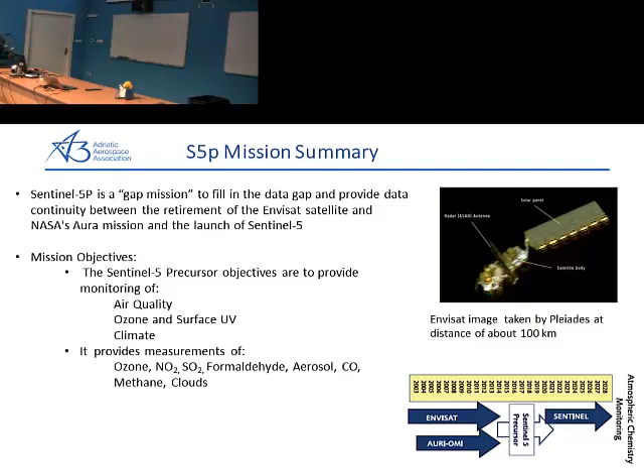Okay, so now about some mission dates, mission details. We are going into a sun-synchronous orbit, its altitude is just about 800 kilometers, and inclination angle is about 98 degrees. So the polar orbit is lifted above the North Pole and passes by 8 degrees.

This is what we call a retrograde orbit, because when you look at the North Pole, the Earth is rotating that way, towards the east, but when you look at the projection of the spacecraft, it has the opposite sense. So we call it a retrograde orbit.

Orbit repeat cycle is 17 days, so after that the spacecraft will come to the same point. The swath width is the angle projection on the Earth from the spacecraft which covers the ground. So if the instrument is looking down on the Earth, what it sees on the Earth is the swath distance, and it covers about 2,600 kilometers.

Science data collection per orbit is about 92 gigabits. Data downlink is normally once per orbit. Operational lifetime is about 7 years, although we carry consumables for 10 years.

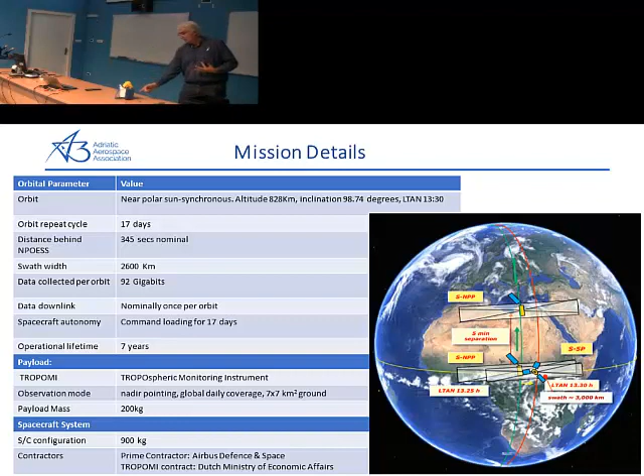What Tropomi means is Tropospheric Monitoring Instrument, and observation mode is nadir. That means the spacecraft Z-axis, in our convention — other countries and organizations have different conventions — but our convention is that the Z-axis is the longitudinal axis of the spacecraft.

The mass of the Tropomi instrument is 200 kilograms, and the mass of the spacecraft together with Tropomi is about 900 kilograms. And the contractor was Airbus.

I need to explain something to you. For a spacecraft, this is the payload or instrument. Below the instrument, we call it the bus or platform. In some literature, or for some people in the UK, they call it the spacecraft platform.

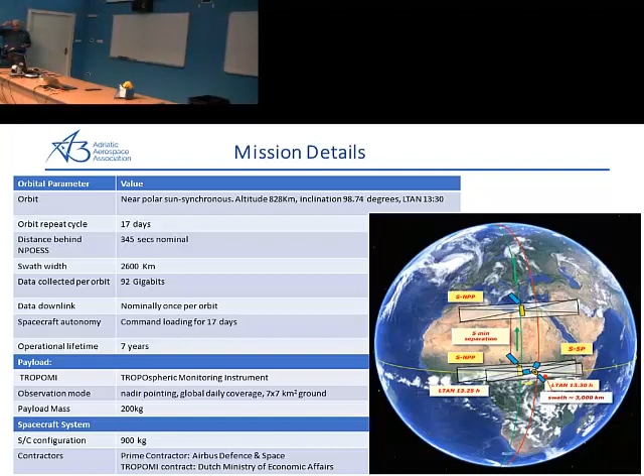All data coming from Copernicus and Sentinel-5 is free for use. Everyone among us can access the data.

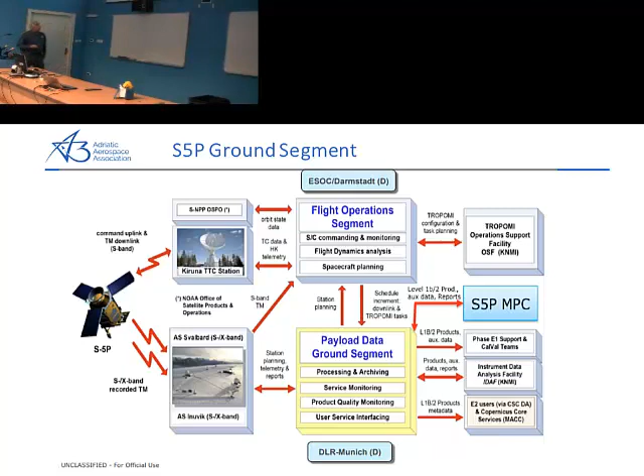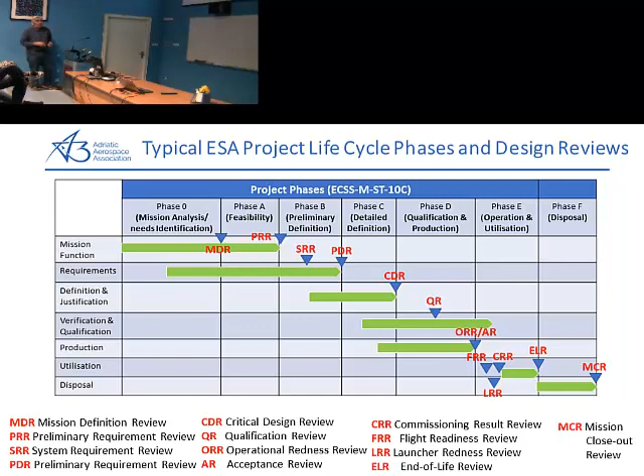And then we go to build the spacecraft, qualification campaign, launch, flight readiness review, end-of-life review, and at the end is the mission closeout review. So now at each of these details, we're going to look a little bit more closely.

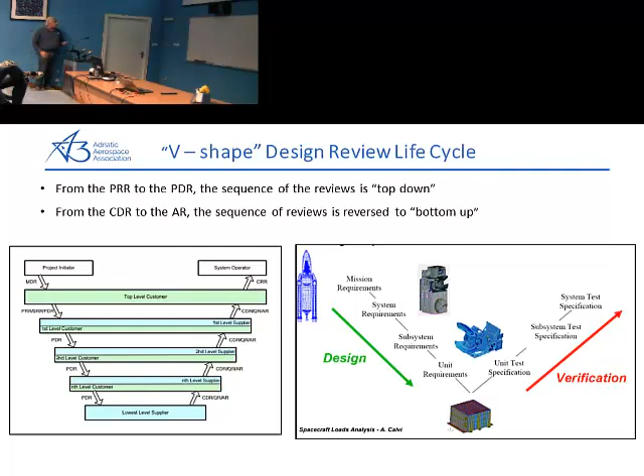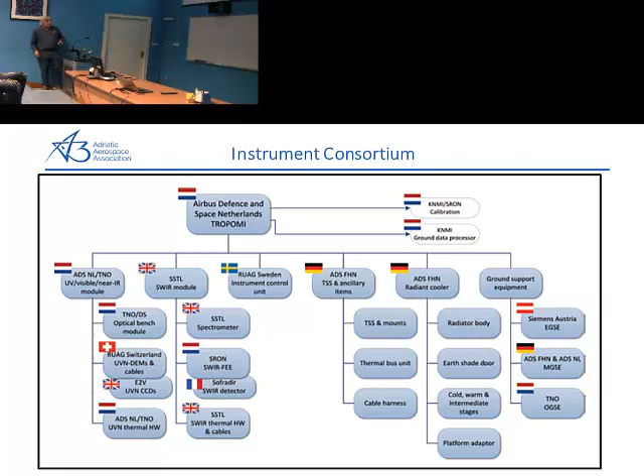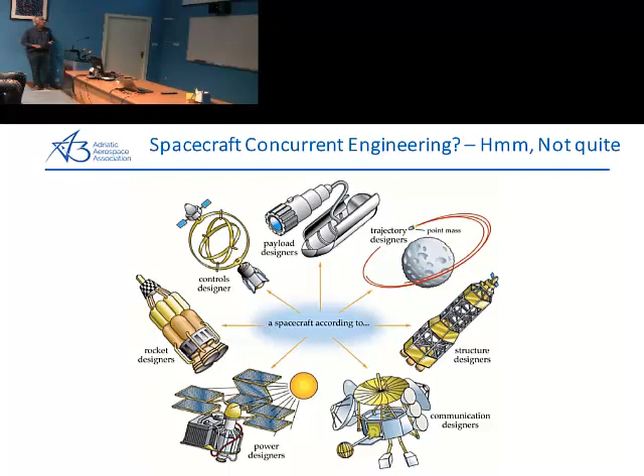So it's primarily top-level activities between the agency, a spacecraft integrator, the science community, and other organizations. Then we try to develop the preliminary technical requirements, identify possible mission concepts, whether we go into polar orbits, geostationary orbit, or maybe Molniya orbits. The Russians, they prefer more Molniya orbits.

Assessments of the payload technology readiness level - we need to see what has been flown before and whether we can build on that experience and knowledge. And we will also do a preliminary risk assessment. Can we perceive the risk coming towards us? Can we see just on the horizon? Or can some more experienced engineers, like myself, look around the corner at what's coming towards us?

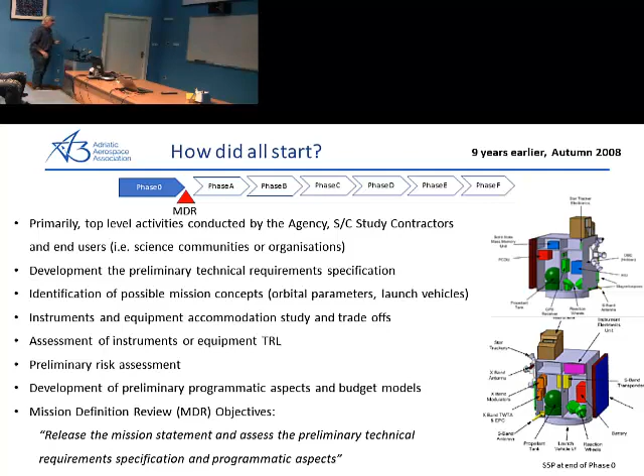So we had to create a bid team. A bid team works on creating a bid, which we later supplied to the agency. So we went through a lot of iterations - iterations that changed the whole concept of the spacecraft. And then at the end, at the top level, probably just the system engineer and engineering manager would go to the agency and review the system requirements, the top requirements.

And at that point, the system requirements are frozen - no change. This is it, this is the gospel now. We can't change the system requirements anymore. If we change the system requirements, it becomes very costly, okay?

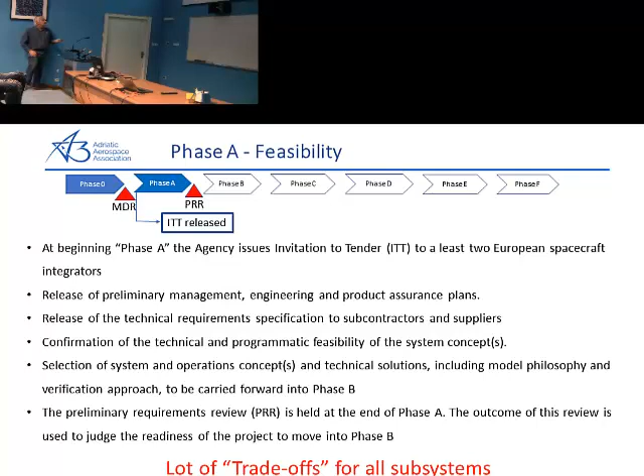So you are still in phase A, and you can see now how the spacecraft architecture, the geometrical model, is starting to look like the real thing. At this stage, we still wouldn't have full information about the geometry of the model, or full information about the geometry of the solar arrays or equipment.

So what we do is we just put what we call allowable volumes - a placeholder in the spacecraft. Our designers, the CATIA guys, will just put a box and say, well, that box is the OBC, onboard computer. Right there, at that point, is the PDHU or any other equipment.

In fact, at this stage, we didn't have even information about the solar arrays because they hadn't been designed yet, but we did know what the power requirements were. Our power engineers sized the solar arrays - actually, this solar array is sized about 1.75 by 1.24 meters. So they know the size required to support the mission and the payload, but we don't know the details, so we just put allowable volumes.

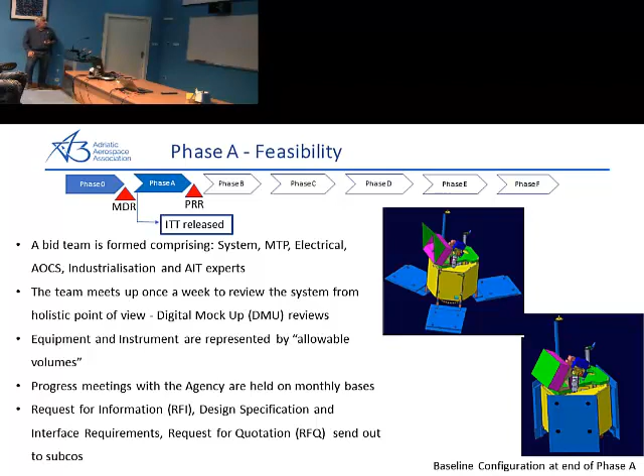But afterwards we will also send a request for quotation, where we ask them for a firm ceiling price to supply the equipment or subsystem. So this is at the end of the PDR - the process of the preliminary design review. It's not going to be exact, but preliminary - we would have a sort of feeling of whether this design would work.

At that point, we would decide which verification approach we're going to use, whether we're going to build a breadboard, engineering model, or maybe STM model, or what is going to be the whole spacecraft verification approach, whether it's FM model or PFM. BB is breadboard, EM is engineering model, STM is structural thermal model, FM is the flight model, and PFM is proto-flight model.

When we put them on the shaker to verify these models, they all have different verification levels. Flight model would have the lowest verification levels, and qualification models would have the highest. Breadboard is the model which just gives us proof of the concept. Engineering model we would build probably just from commercial materials and see roughly whether it's going to work or not.

Then we would update PDR data, update technical requirements, and a PDR data pack is sent to the agency to review. ESA will take all the data pack and turn every single stone in it, coming back to us with loads of questions. We call these questions RIDs, request for information or discrepancy. Sometimes they generate hundreds on a bigger mission. This is a small mission, but it could be 1,000 questions, and we would carry these questions almost to the flight readiness review.

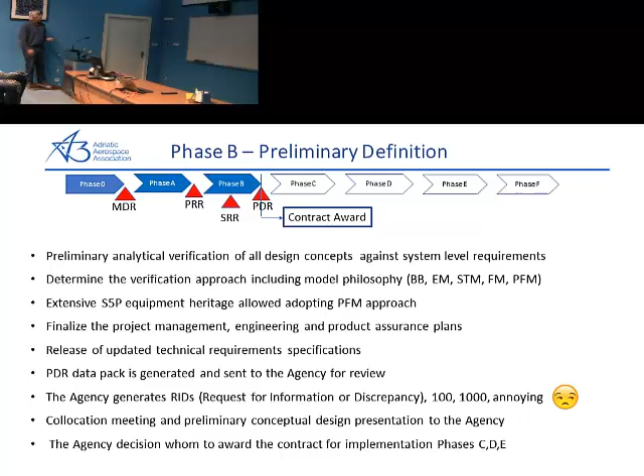Now we come into phase C. At the end of phase C is a design review called critical design review. This is a really important milestone in the design of the spacecraft. It's a point where you decide, or someone else decides for you, whether to carry the project through to assembly of the spacecraft, or you stop there and wait for better days.

In terms of analysis, we just turn the handle again. We do all the analysis we did at PDR, but now, after PDR, we've learned something, so we update our models, review our assumptions. Our mechanical models, FEM models, thermal models, or AOCS models look different now. We learned from the results of the first cut of analysis, so we're all busy updating assumptions, updating models, going through the same motions again, and again generate a data pack.

We send the data back to the agency, they review the data pack, they raise RIDs again, we go back to ESTEC, present our designs, try to shoot down as many of these RIDs as possible straight away, and ESA will decide: right, guys, our design is mature enough, you can start cutting the materials, or they can say stop, they just put a plug on it.

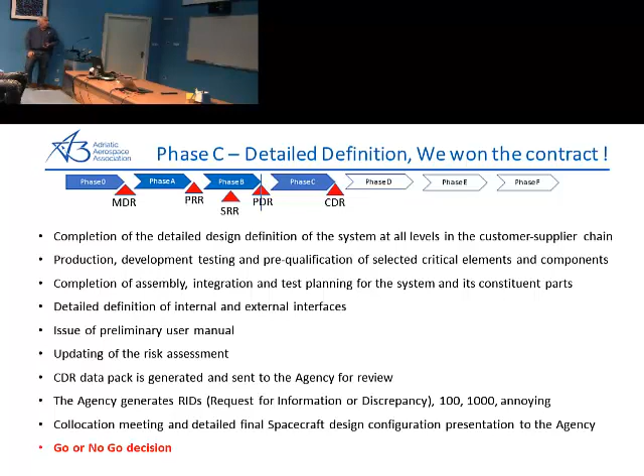Our Rockot was the primary launcher, and Vega, at the time when we started this design, hadn't had its maiden flight yet, so it was still in the development and qualification cycle. The spacecraft wet mass was 928 kilograms, so you need to go to the user manual and check what is the maximum lift mass where the Rockot can lift that mass and deliver it into an orbit just above 800 kilometers.

So we declared, to give us a bit of margin, that we're building a spacecraft which can deliver 1 ton of mass to orbit. So we had a mass margin of about 72 kilograms. Right, we had a problem here.

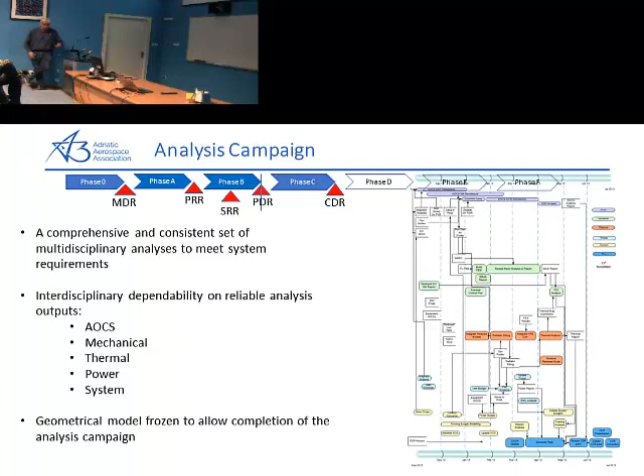So in mechanical architecture, we are like the Roman god Janus - we are multi-faced, facing so many subsystems, but we are actually the backbone of the spacecraft. We provide support to the equipment, we provide support to the payload, we provide support to thermal equipment.

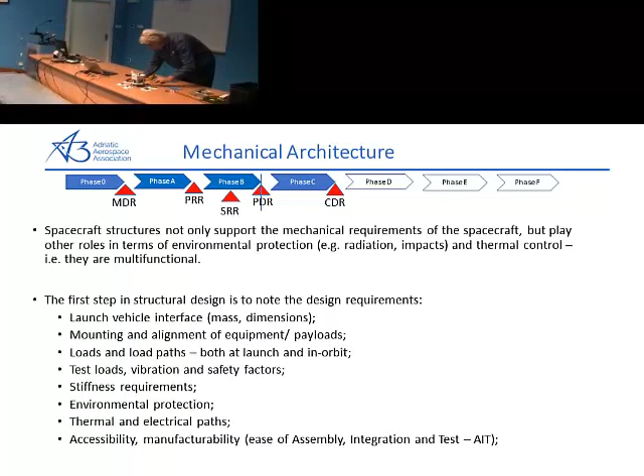So we distinguish three types of structures. We distinguish a primary structure, which is the structure that carries the load. Then we have what is a secondary structure, which will be like small bracketry here or there. Or sometimes we have what's called a tertiary structure, which is like small studs that support MLI, the multi-layer insulation.

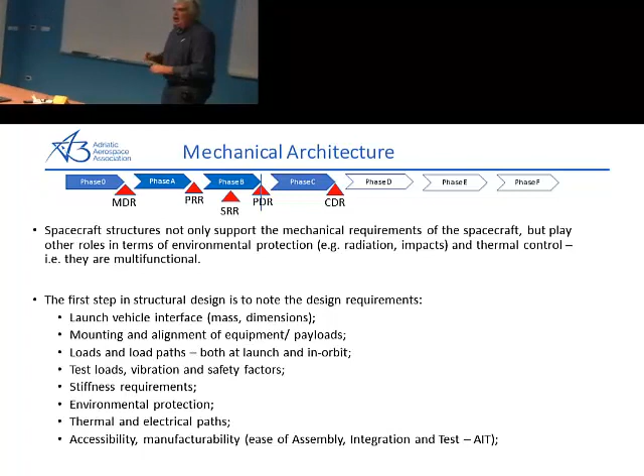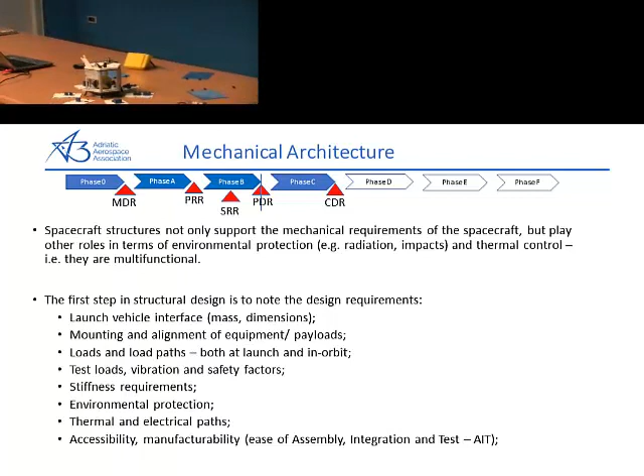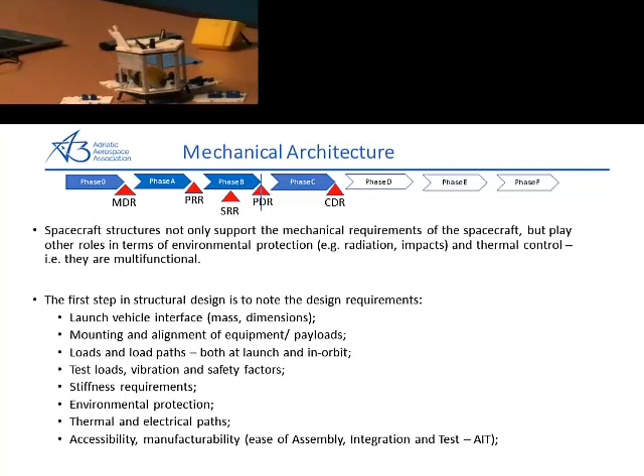So one of the first tasks for a mechanical engineer is to look at the launch vehicle interface. We need to look at how we can actually mount the spacecraft to the launcher, so we look at the bottom - it's called this round circle here, the launcher interface ring. We also look at whether we can accommodate the spacecraft into the launch vehicle fairing, so we look at the mounting and alignment of the equipment and the payloads.

For load paths, we use a mechanical analytical tool called Nastran, which is the industry standard. We look at stiffness requirements, which come from the user manual - each launch vehicle will tell you the minimum required stiffness of the spacecraft, both lateral and axial. We also look at environmental protection, how to protect the inside equipment from radiation and from meteor showers.

We also provide a thermal and electrical path to the spacecraft. All equipment has to be grounded, so we provide a grounding point from the equipment down to the spacecraft panels. But it's not only that - we need to make sure that whatever we design is manufacturable and can be assembled. This is what we call design for manufacture, making sure that everything we design and analyze can actually be made.

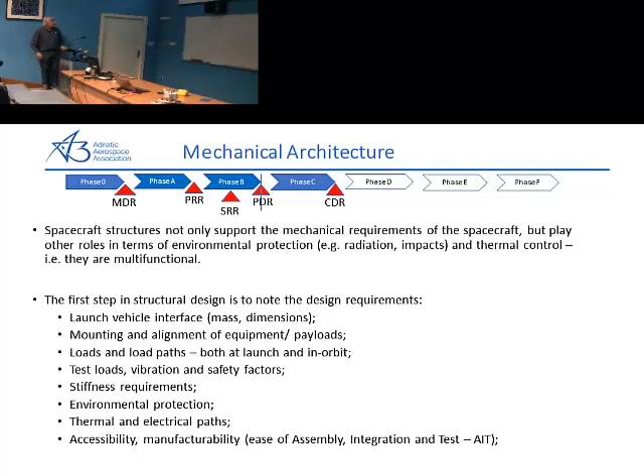Right, so I've brought some little pieces for you, I'm going to pass around. This piece here is a test sample for pull-out inserts. We do strength confirmation verification of the strength of this insert, pull-out and also shear. And you will see a cross-section of that insert, and consistency of the potting material of this insert.

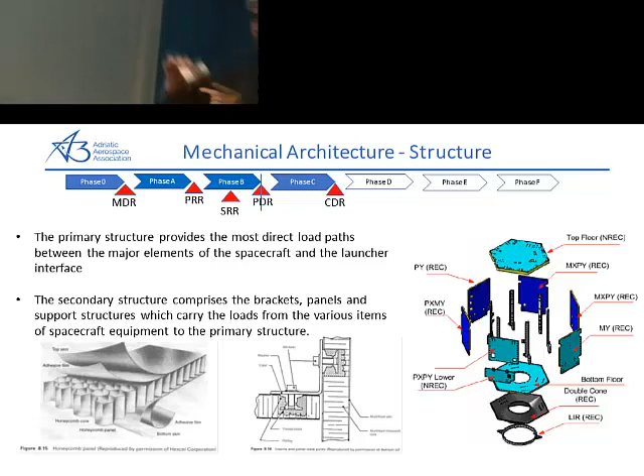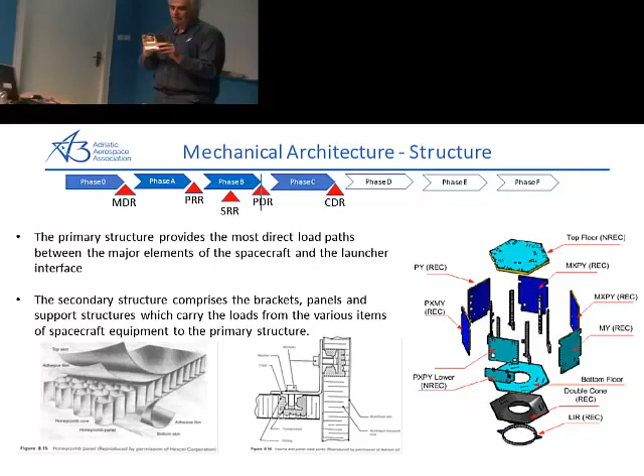So this is what we call a honeycomb sandwich panel, all aluminium skin. If you have good eyes and look closer, maybe not in this lighting, you'll see tiny little holes in the honeycomb core. These holes actually provide a venting path for air to come out, because when the spacecraft ascends, the air wants to expand. If it can't expand, it will pop out one or a few honeycomb cells.

So this is what we call a perforated honeycomb core. I'm going to pass a few pieces around. This one here is partially potted - we cut this in half and look at the consistency of the potting compound. And there is one which is fully potted. This one is a fully potted insert. You can see how light this material is.

So if you pass this around - cheers. What you see, that color, is actually an allochrom color which protects the spacecraft from corrosion. There are free atoms of oxygen which could attack the skin and corrode it. But also this particular surface finish is used for thermal protection as well, because it has good emissivity properties.

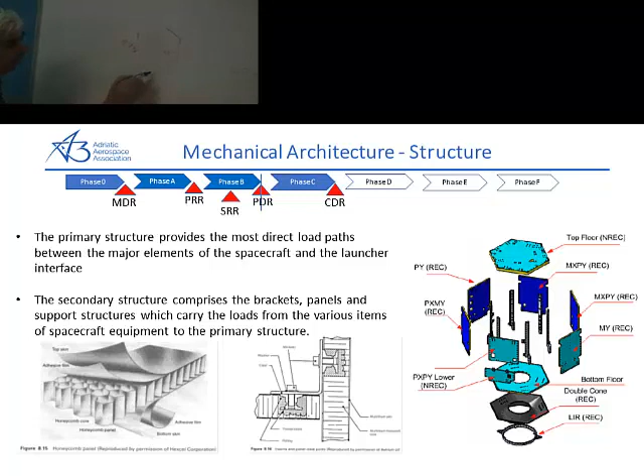On the launcher side, on the launch vehicle adapter, there is a similar profile, and it goes something like this. So these two surfaces are mating - this is just a guiding feature.

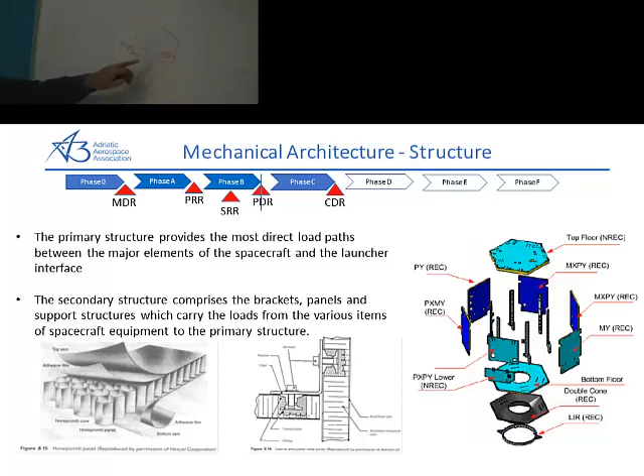And then, how are we going to keep these two parts together? How is the spacecraft not going to fall off? Well, there is something we call a clamp band - it's just like my belt. It's a tension belt, and on one side there is a pyro bolt. So we tension that clamp band, and then when the spacecraft is in space, we send the signal, the charge in the pyro bolt is activated, and the clamp band is released, and the spacecraft is free.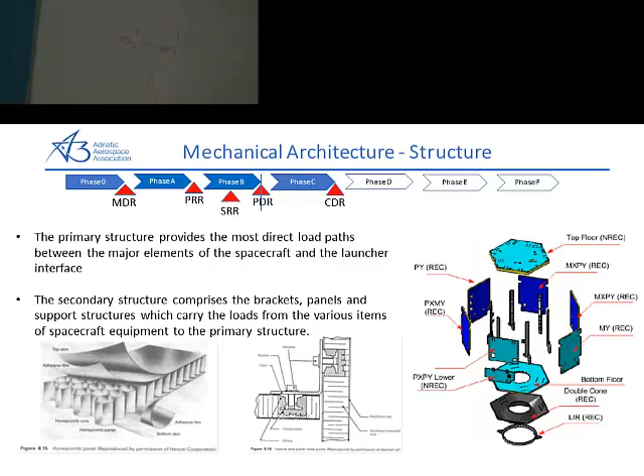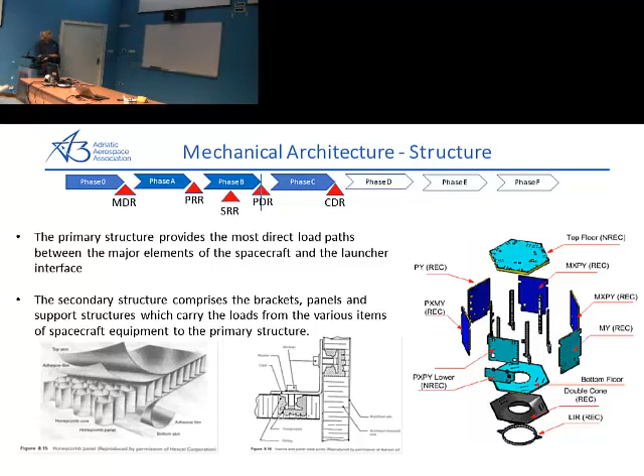Right, okay, now next one. Oh, let's take control - ah, it's here. Okay.

And then we will have axial mode, and probably one of the components would be generating mode shape. So we look at what is the modal effective mass associated with this particular mode. Imagine if I put the TROPOMI on the top, usually goes this side. What I get is just a drum effect of this top floor, the top floor just going up and down like a drum. That was part of the reason why I didn't like that design, but I was arm-twisted to go for it.

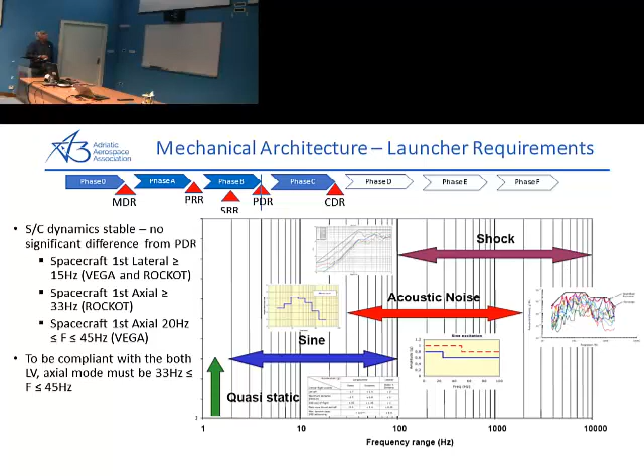Right, okay, so we are now still in phase C. We haven't passed CDR yet, I'm surprised.

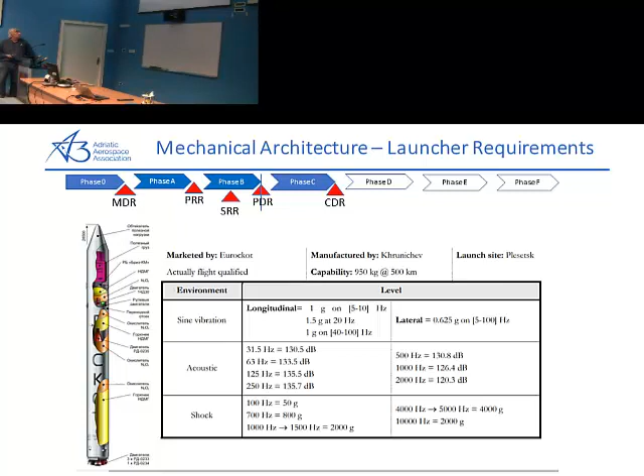Okay, so this is the same spectra, just in the picture. We can see quasi-static loads coming from acceleration of the spacecraft or some gust wind hitting the launcher, and then the spacecraft inside the fairings picking up that acceleration.

Sine vibration normally runs between 5 and 100 hertz. We analyzed the spacecraft to 120 hertz, but we qualified only to 100 hertz. The reason is that sometimes at the end of the excitation frequency, we have a mode building up.

So during the test, we really don't know whether... for example, if I have an axis, okay, can you see? So this is acceleration level, and this is the hertz frequency domain.

And then we have the first mode, second mode, and then something at 100 hertz. In our analysis, we might predict we have a significant mode somewhere here, but we are testing only up to 100 hertz. This is our analysis, this is how we perceive it's going to happen. In reality, that mode could come into the excitation frequency range. So this is the reason why we analyze the spacecraft to 120 or, in some cases, 140 hertz, just to account for that mode which would come into the excitation range of the spacecraft.

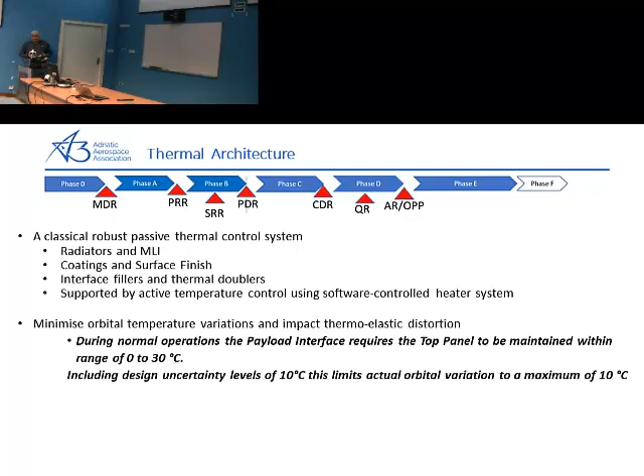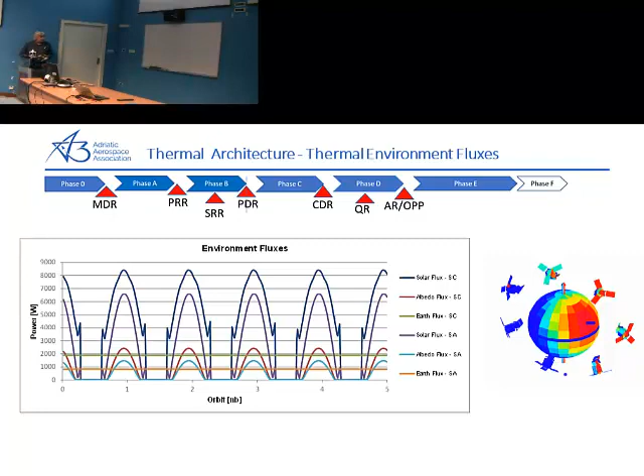This is some of the tricks we do to control the heat inside the spacecraft. We have a thermal doubler, which is just a piece of aluminium that acts as an interface between the equipment, the black box, and the spacecraft structure. When heat is generated from the equipment and dissipated, that thermal doubler heats up as well. When the spacecraft goes behind the Earth, into the Earth's shadow, it still carries a bit of heat and provides heat back to the equipment.

When the instrument hits some minimum required temperature, thermal heaters kick on. I'll show you some examples of the thermal heaters. This is a thermal heater which is wrapped around a propulsion pipe. It's wrapped around, and then we put MLI around it, and that prevents the propellant from freezing. Similar heaters are put on each equipment to keep it working at the required level.

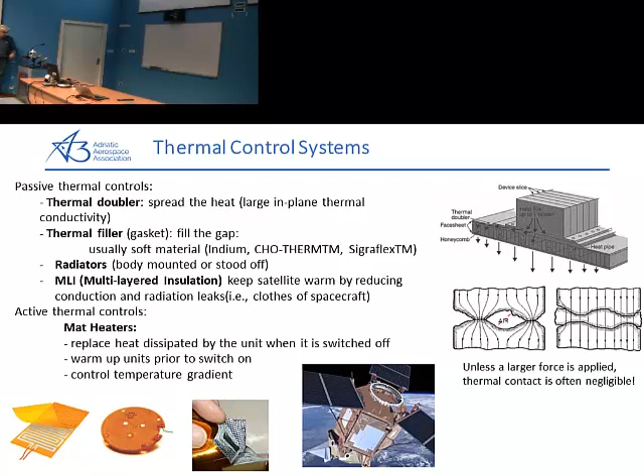Right, now we're going to talk about propulsion. On the spacecraft, on S5P, we used a propulsion module, PN22, which was developed in Germany, I think in Bremen. This is actually a classical propulsion module - we call it a blow-down propulsion module. The reason we call it blow-down is that they use another gas to push the propellant, in this case hydrazine, down through the system and down to the thruster.

Nanko, do we have the laser here? Is this the laser? Ah yeah, okay, yeah, I got it. Right.

This tank is about 83 kilograms. Two-thirds of the tank will be propellant, and on the top is what we call empty space, or ullage, which is filled with either nitrogen or helium.

And then there is a filter underneath. The tank is equipped with heaters as well, and the strain gauges. The heaters we use to prevent hydrazine from freezing, because hydrazine might freeze below 20 degrees. So we keep hydrazine at a temperature between 20 and 40 degrees.

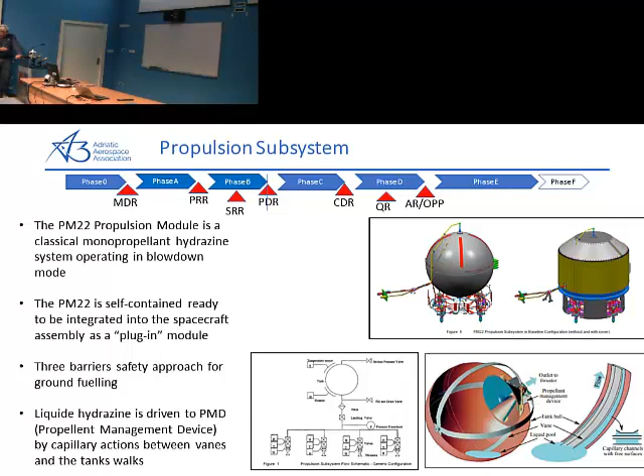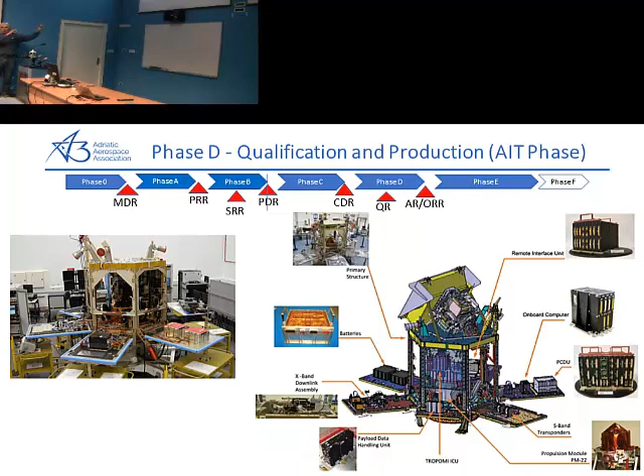In Airbus, we are very much aware of these situations, and when we start the assembly phase, our quality assurance people have a big say. No instruments can be installed on the spacecraft without the signature of quality assurance. We have a meeting before installation of equipment called the instrument readiness review. Engineers would write the installation procedure, and the quality assurance engineer would ask: is the technician aware of this installation procedure? Have you read it? Have you been approved? Do you have the kits available - bolts, torques, consumables, MLI, and all the rest of the stuff - and then he would approve installation.

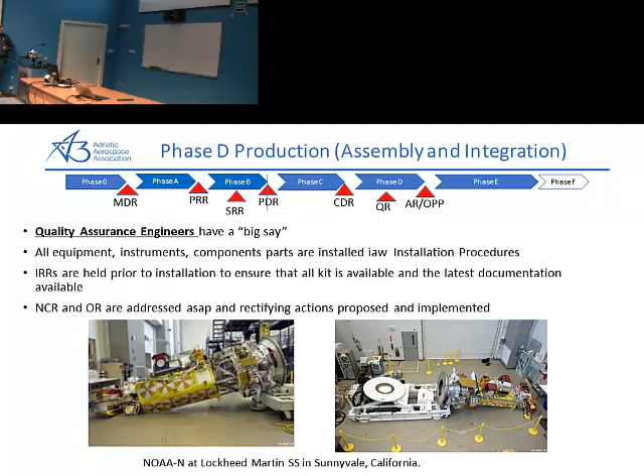So we've now designed the spacecraft. The spacecraft is ready, we went through the installation procedure, everything is on top, the payload is on top, all equipment is on top. Inside the spacecraft, the propulsion module is tested, and we're going to go through the thermal test.

The thermal test is really cooking the spacecraft - it simulates the thermal environment in space. We put the spacecraft into a TVAC chamber, pump the air out, and pumping the air from the chamber could last for 2 shifts, 2 days. The pressure in the chamber would be something like 10 to the minus 5 millibars, so almost nothing inside. Then we heat it up, cool it down, and heat it up again, and the temperature would vary from say minus 100 to plus 100 degrees Celsius. Then thermal engineers would start switching the equipment on, because equipment inside the spacecraft, the payload, still has to work in harsh conditions. So they do on and off switching, testing that the equipment works in that sort of environment.

Then we go to mechanical test. Mechanical test is mostly vibration testing in various forms. Somewhere along the line, we would do a propulsion leak test and the maximum operating test on the propulsion system. Before environmental testing, we take an alignment test of the spacecraft to make sure it's aligned. When we finish the test, we do alignment again to make sure nothing has moved. It does move, but not significantly - it's always a settling effect.

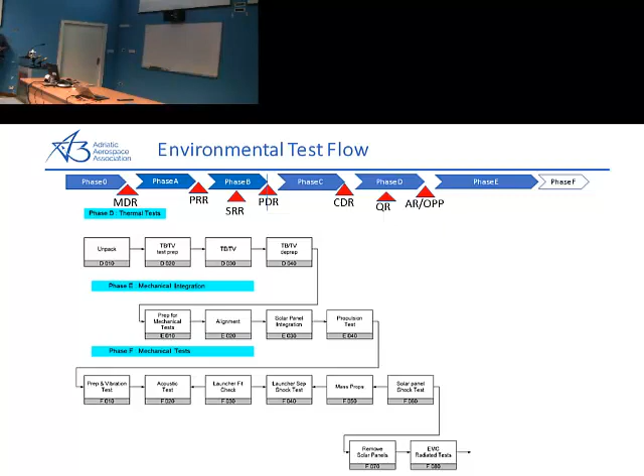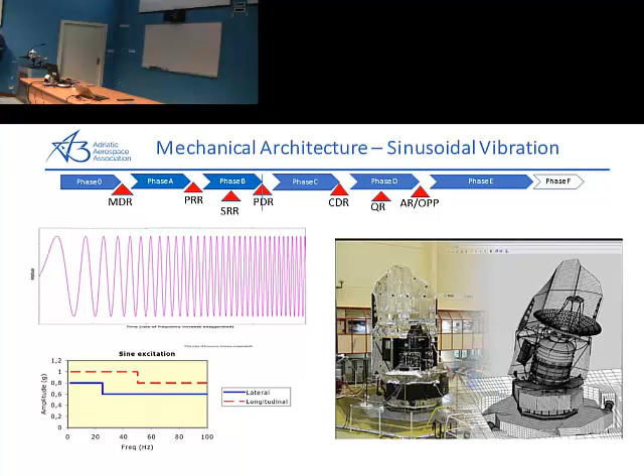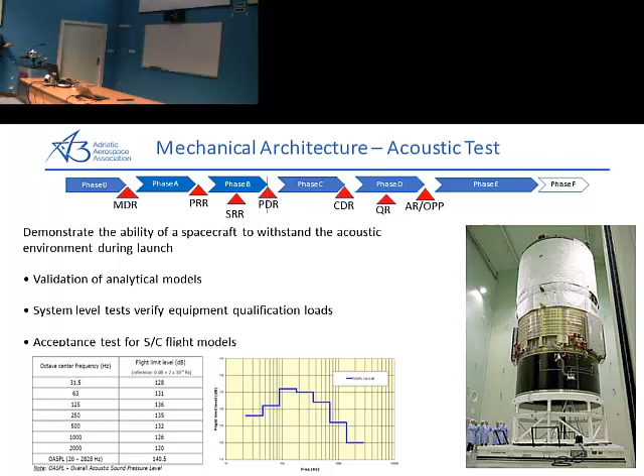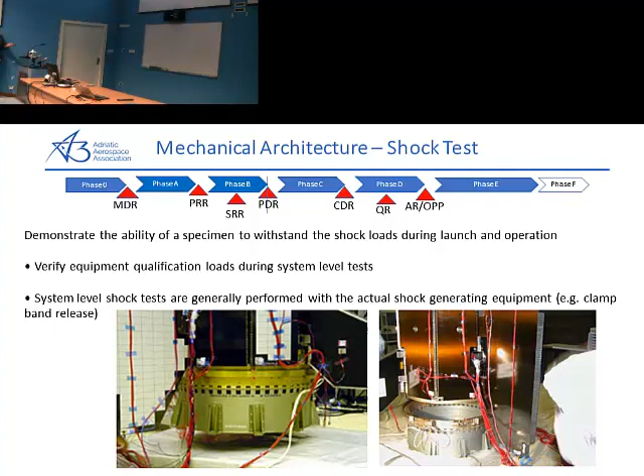You can see here, this is the umbilical cord - the cord which provides support and power to the spacecraft from the launcher. And this bit here, this is the clamp. I hope I'm going to be able to show you, okay.

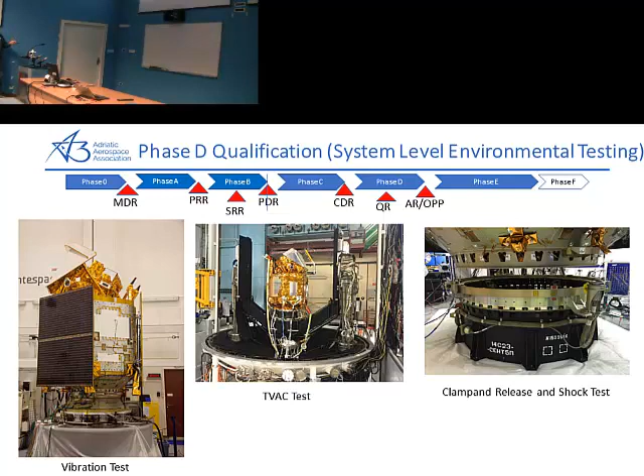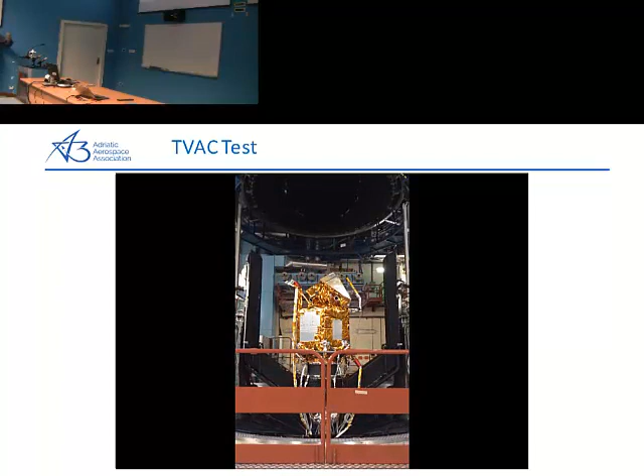Okay, so now this is the baking test. This is taking the spacecraft into TVAC at IABG in Munich. You can see the spacecraft is attached to the lower part of the TVAC chamber, and then they push it inside, pump the air out, and they bake it, cook it and bake it. Literally, they cook it and bake it.

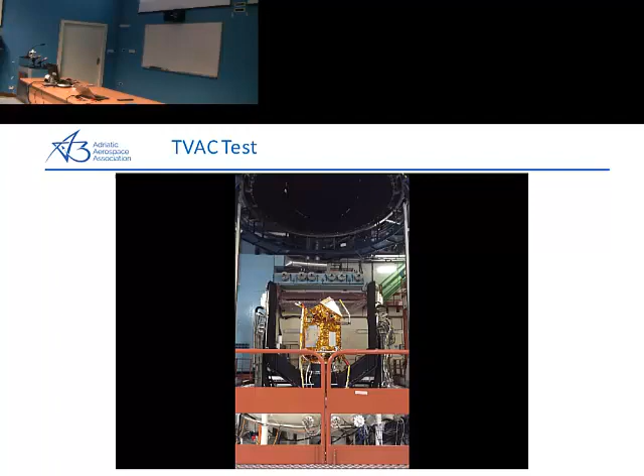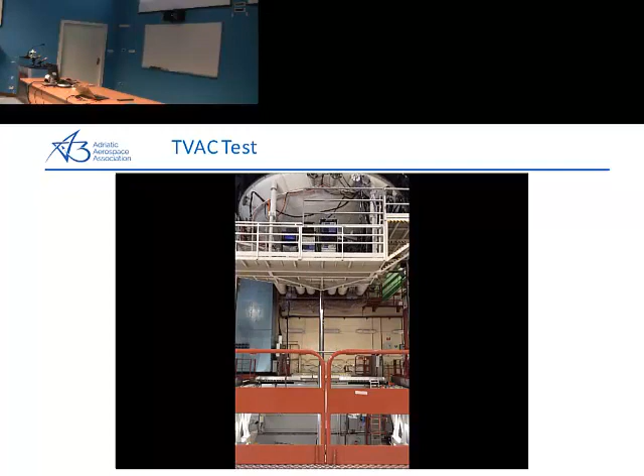Right, now this is a high-speed camera, and because the separation of the launcher - actually a shock test - and the separation test from the launcher, if I show this, you'll see this clamp band separated by pyro bolts, and the interface to the spacecraft is released, and the spacecraft is separated. And on this side, you can see the umbilical cord, and the clamp band is released, and the launch vehicle adapter was released.

Well, the spacecraft requirements from the launcher - again, it's all about requirements from the launcher, otherwise we can't fly. It comes that the center of gravity of the spacecraft, particularly for the Rockot, has to be within a 5 centimeter sphere from the longitudinal axis of the launcher. So when we design the spacecraft, we run a mass spreadsheet and calculate at each design review phase, making sure the spacecraft center of gravity is as close as possible to the launcher longitudinal axis. Sometimes it's not possible, so we need to carry a dead weight.

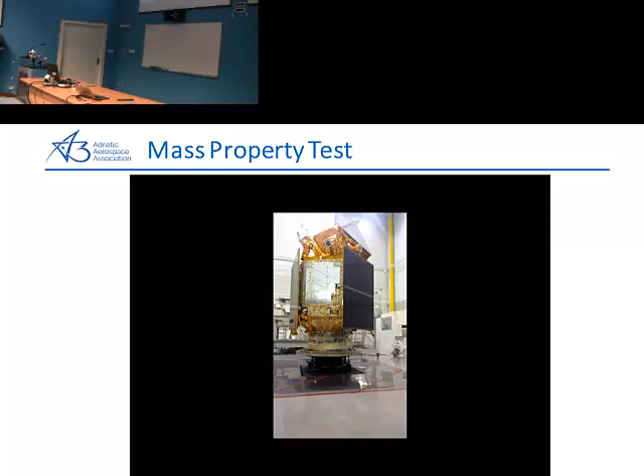So you can see these blocks here, these 3 blocks - this is actually a ballast mass. This is similar to when you take your car for balancing - the speed of rotation of the spacecraft is something like about 5 revs per minute. So you can see now the rotation and the checking of the spacecraft center of gravity is within the requirements of the launcher.

Right, okay, so now this is the launch campaign in pictures. We are nearly there. So the Antonov is arriving, and the cargo load is our S5P. It's taken out of the aircraft, put on the train, transmitted and transported to the launch site, and then the spacecraft is fueled. Once fueled, the spacecraft is mated with the launch vehicle adapter. Once coupled with the launch vehicle adapter and the Breeze, it's encapsulated and lifted onto the rocket and fired off.

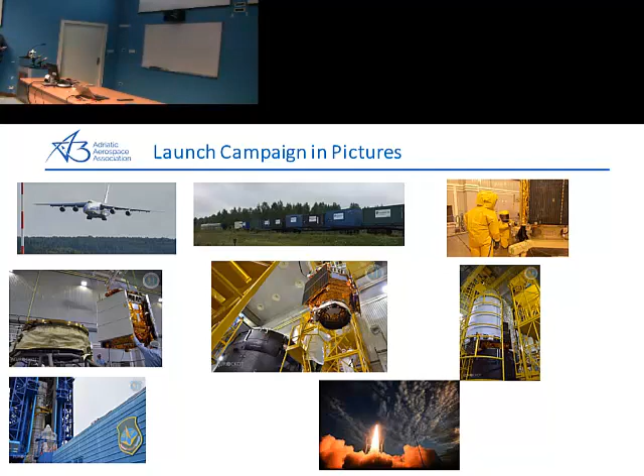Yeah, this is all about the Copernicus program. You can read this on the internet - there's a space component and a service component, and this Sentinel-5 generation of satellites is an initiative of the European Commission and run by Copernicus. All data are free and available for use.

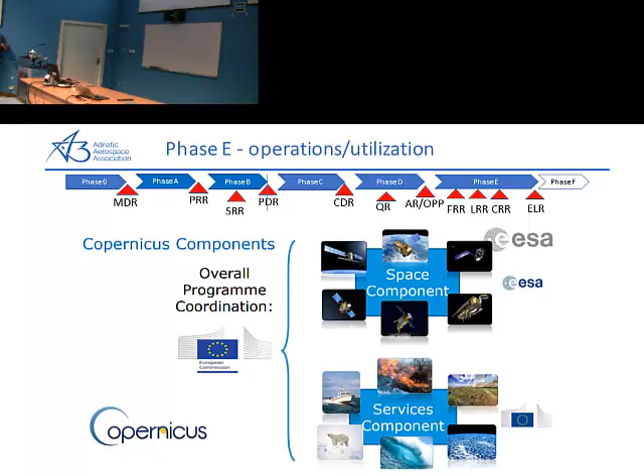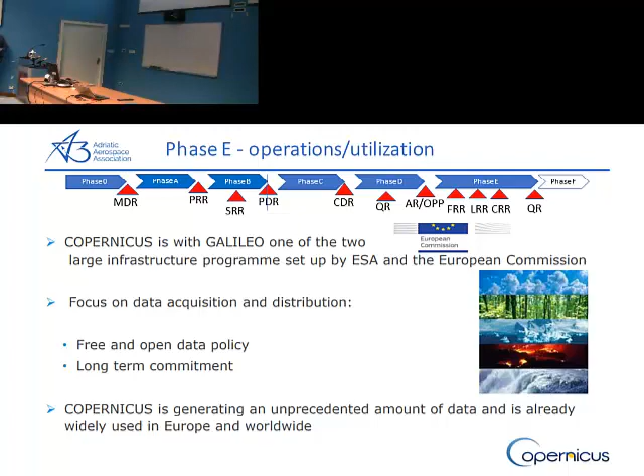If you want to look at any data, if you want to look at pollution in your town, you go to the Copernicus website, register, and you can have a look. This is some sort of data S5P is looking for - pollution and composition, chemical composition of the atmosphere.

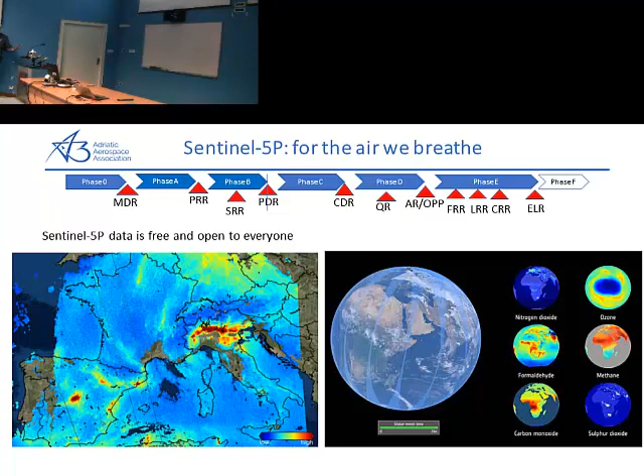Now, once we finish the job in orbit, we'll have a mission closeout review, and the spacecraft has to be decommissioned. All remaining fuel is vented out, the batteries are discharged, we lose RF communication, and the spacecraft is deorbited. So we lower the perigee of the orbit, deorbit the spacecraft, and we hope the spacecraft will burn down in the atmosphere. We have requirements that all objects in low Earth orbit need to be burned down in the atmosphere within 25 years.

Right, okay, and that is the end of my run.